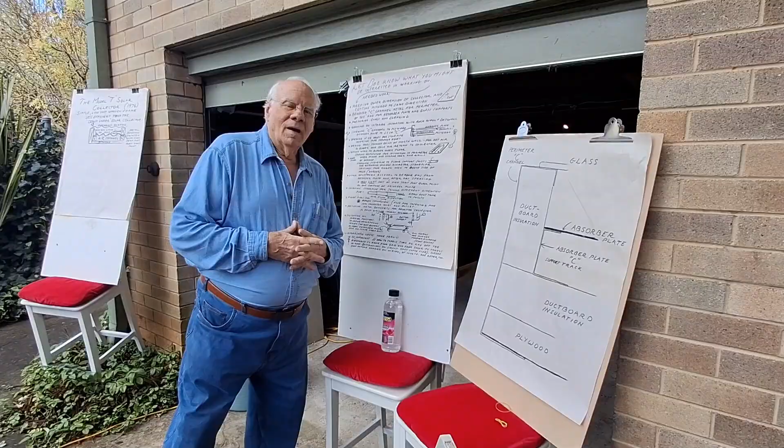So the first thing we'll do is cut this dimension, which is a dimension of the glass, and then we'll build up the collector box, and we'll be putting the collector on the north wall of the house vertically. I want to explain to you a little bit of the schemata of what we're doing, which can vary quite a bit.

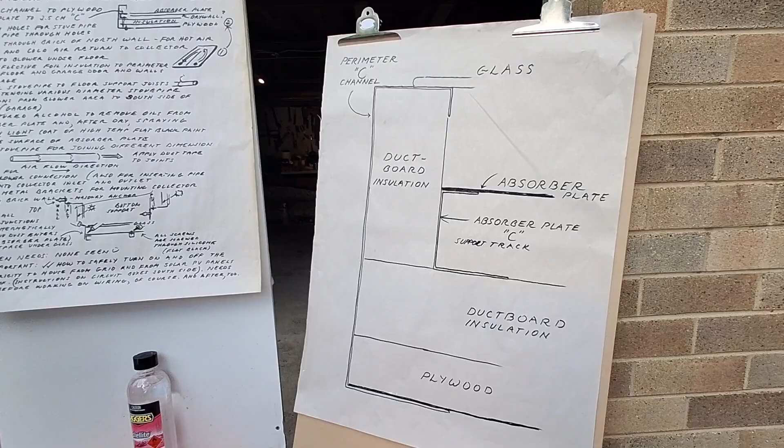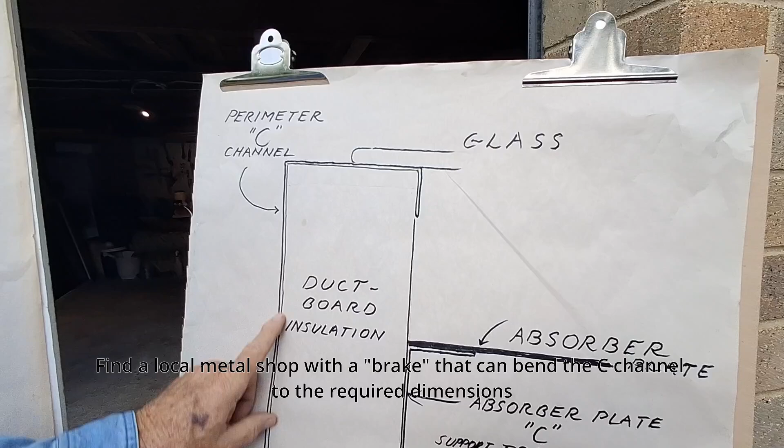In fact, in the old days, maybe you can show this here, we used to make collectors out of wood. And then they started to smoke and char with the heat. So instead of using wood, we now use what we call C-channel, which is bent in a sheet metal shop as a C, a big C. So that'll be the perimeter of the collector right there. And then here's a plywood, so it's going to actually go behind the plywood to keep moisture from coming in. And that's all going to be on the vertical on a wall.

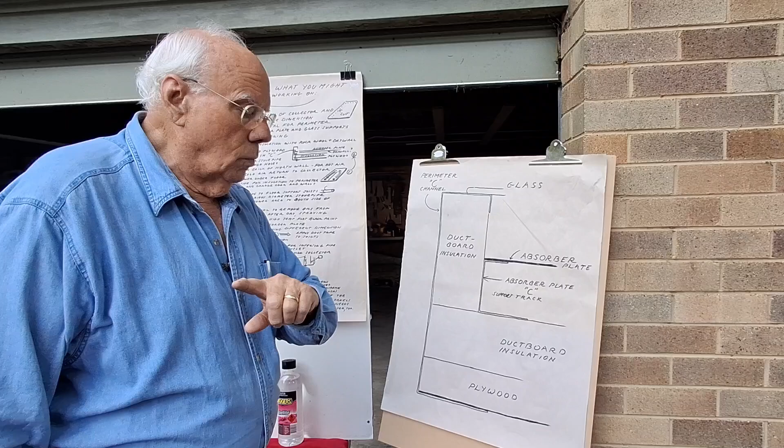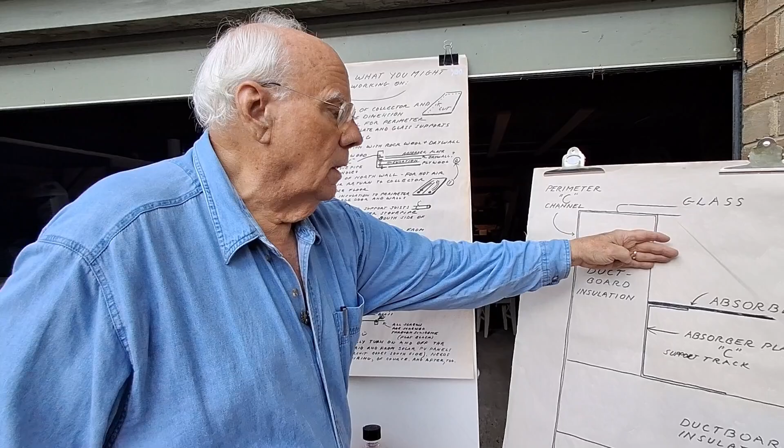So what we're going to work on next is this step over here, where we're going to put two holes into the collector. One will be for the hot air going right to the blower. The blower is going to suck air through the collector, and that'll help clamp down all the interior parts of it. If you were blowing that in, it could blow the collector apart, basically. But we're going to be sucking all that down where it's all silicone caulked. So be sure when you put your blower in that it's pulling air through the collector.

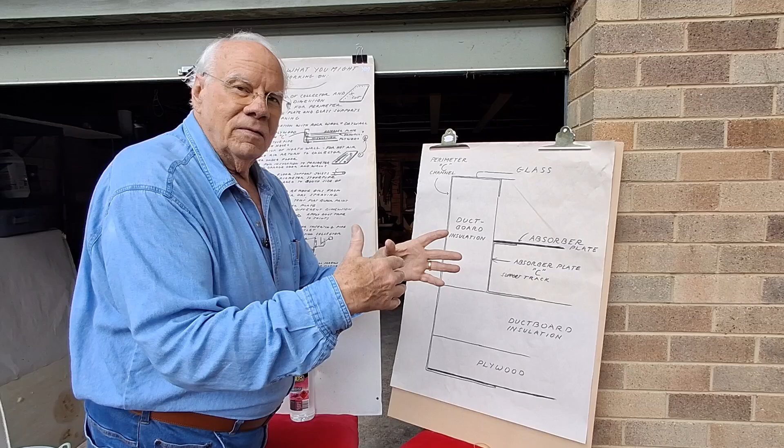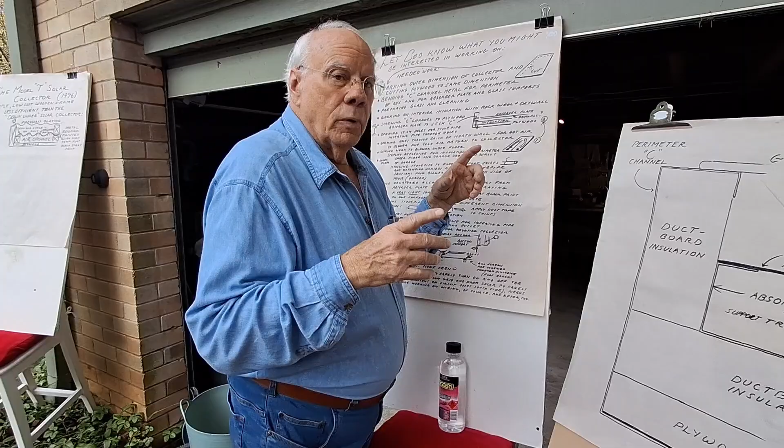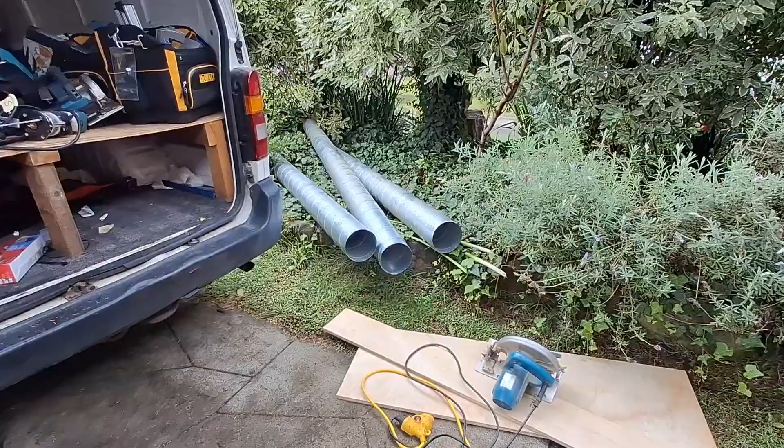Okay, and so Shaun is going to show us how we measured for the hot and cold. The hot line is going to go through a vent already in the crawl space under the floor of the house. The blower will push air, and I think it might be good to show the pipe over here lying down in the grass. It's going to push the air all the way to the south end of the house, because the south end of the house is where it's coldest. And it's going to push it into the garage right there. That's the south end of the house, where we took off the insulation from the garage to allow it to heat the floor.

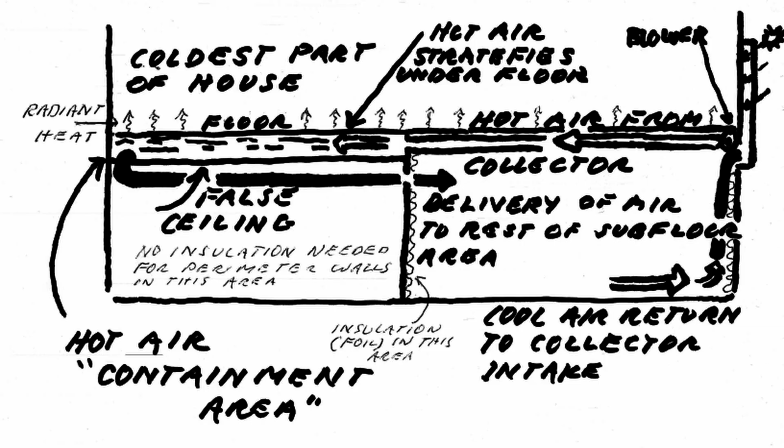And we have found out that when you blow hot air under a floor, the heat stratifies, the hot air stratifies under the floor and turns the floor into a radiant heat source. So Leona's going to be able to go barefoot this winter, or she'll get her money back. This is for free. I'm not charging anything.

And so Shaun will show how we did the measurements for the inlet and outlet to the collector. And how much did you give a little extra so the pipe would fit through easily? 3 millimeters or 1/8 of an inch. Okay. This is just standard 6-inch or 150 millimeter galvanized steel spiral wound pipe, but you could use seam weld or whatever you got. These are joiners. They're also nominally 150 millimeters or 6 inches. The joiners are male. They slot inside the pipe and they have an actual dimension of 148 millimeters. The pipe has got an actual OD of 153.

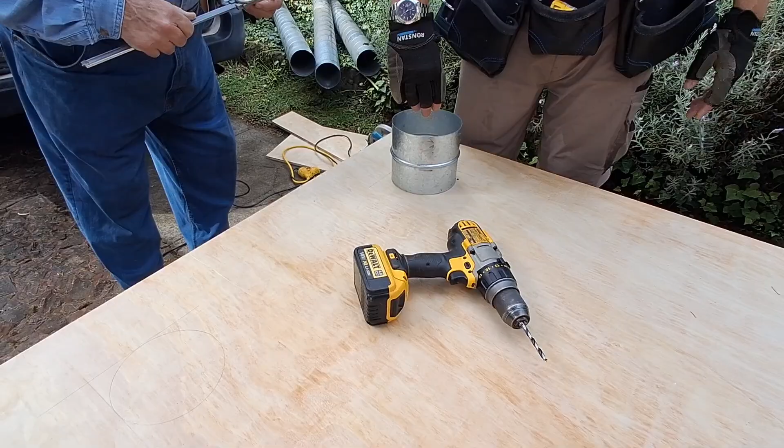We're going to cut the circles here. I've just drawn a line around them roughly, and then we're going to use whatever you've got. You could use a jigsaw, you could use a hole saw. We're going to use a router today because that's what we've got. And cut the hole slightly bigger. We're going to stick the male joiner in there, and then we're going to stick the pipe over that. And what did you use to make these lines? Yeah, just use a sliding square, whatever tools you got. We've set that in 5 inches or 125 millimeters from both sides, and then just draw a circle there so that they match up roughly.

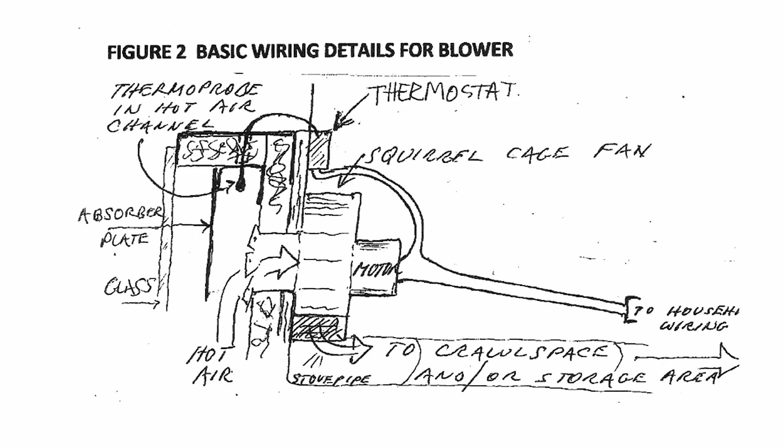So this will be the hot air close to the electric line. It's important to get the blower connected into the electric line, and so the hot air should be as close to the blower as possible. And this will be the cool air return over here. And I think we're ready to roll.

Oh, and I've got some good news. Yes. The sun's out. Well, that is good. What did you just do? I just tidied it up a little bit.

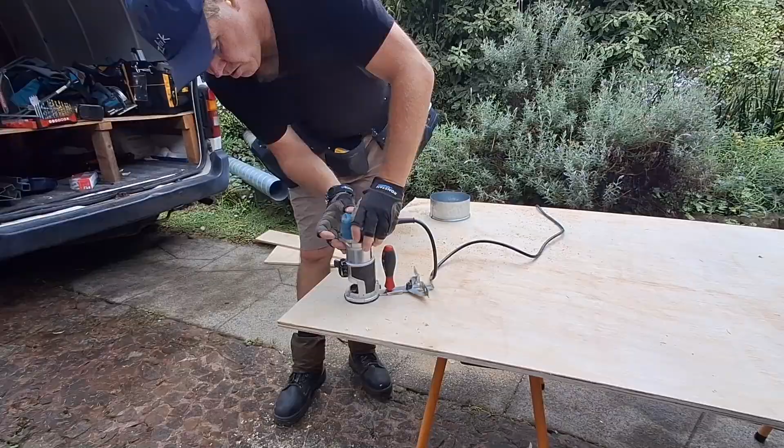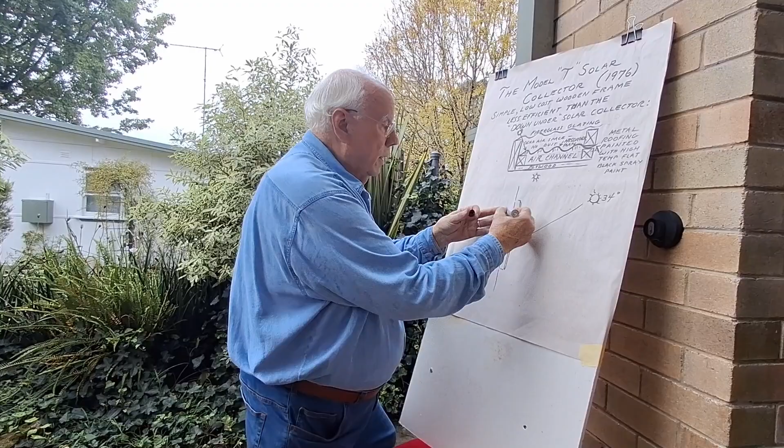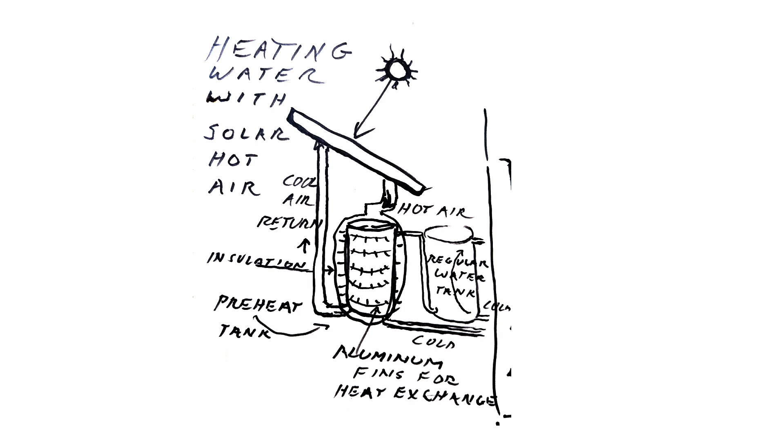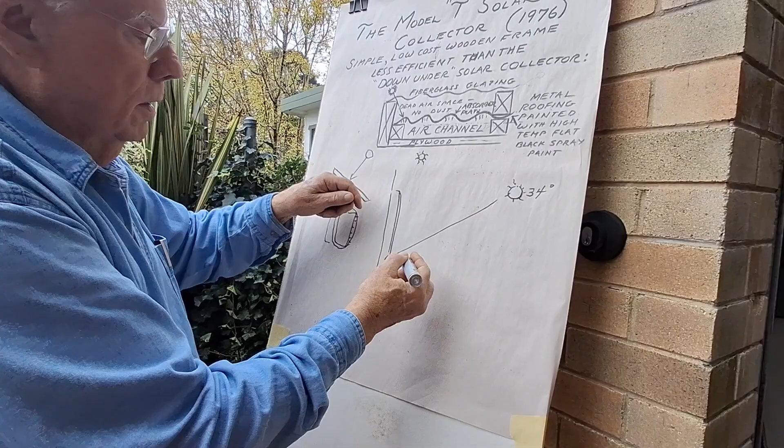I want to show the importance of a vertical collector on the wall if you do not want the summer sun to heat it. Now, if the collector were on a roof, one thing we've learned to do is to heat water with the summer sun, by blowing air around a water tank with fins on it, and then insulation around that, so that you can actually heat water with hot air, and then return that from the water back to the collector in the summer. Well, the system we're doing is not to heat water at all. It is to heat the house. And in the summer when the sun is high, you don't want the collector to turn on.

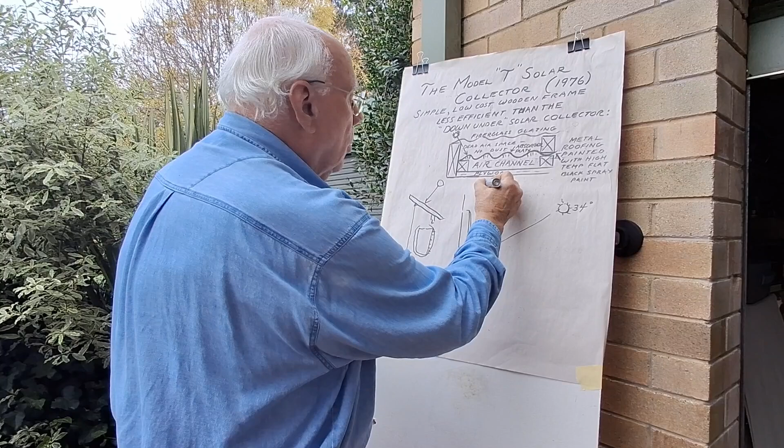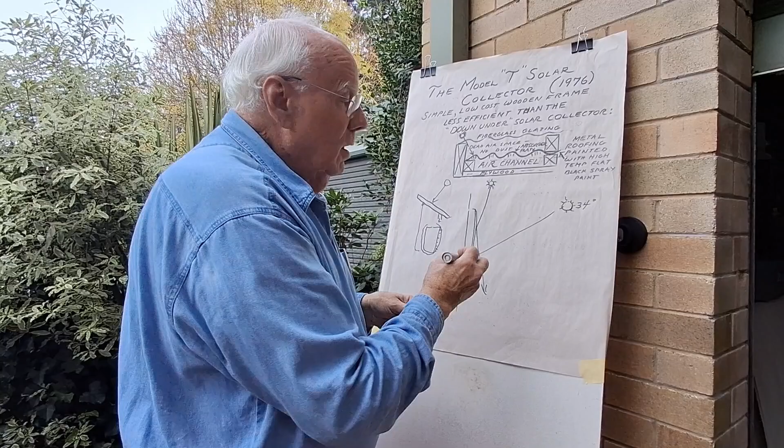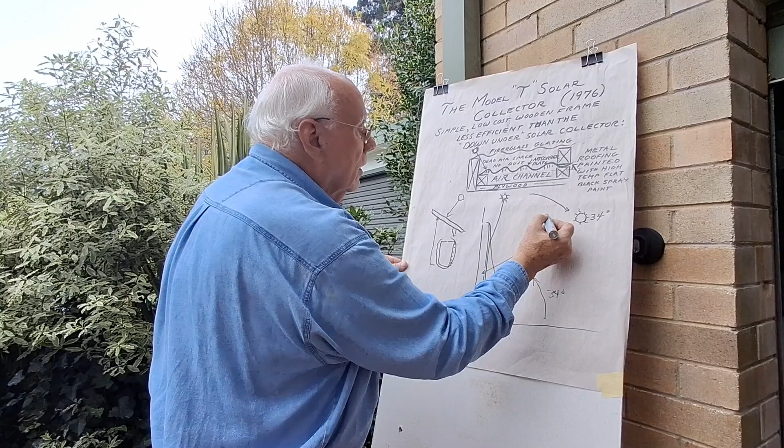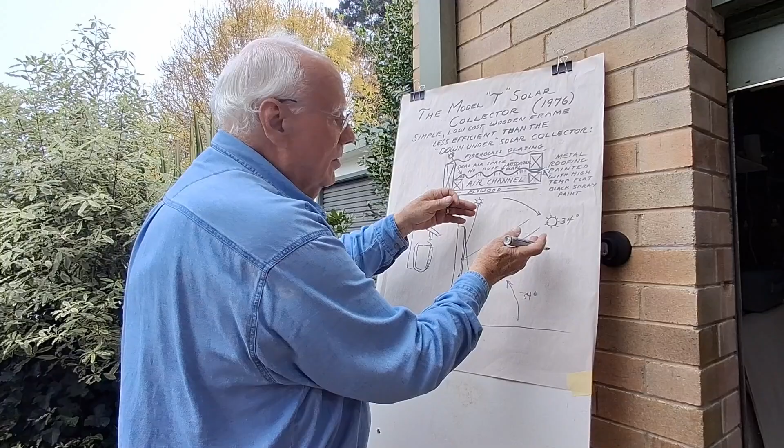And so what we call a real low angle of incidence bounces the sun right off, and it does not heat up the collector. But when you get the sun in the wintertime dropping towards the horizon, here in Wentworth Falls, the lowest point on the winter solstice, this is a 34-degree angle right here, okay? And therefore, the sun's rays penetrate into the collector. All the rays from the sun are parallel, by the way. They all enter into the collector, heating it up in the winter. So the colder it is here, the more hot air you'll get. So it's the way it all works out. And then as the sun comes back up, it turns on less until you don't need heat in the summer.

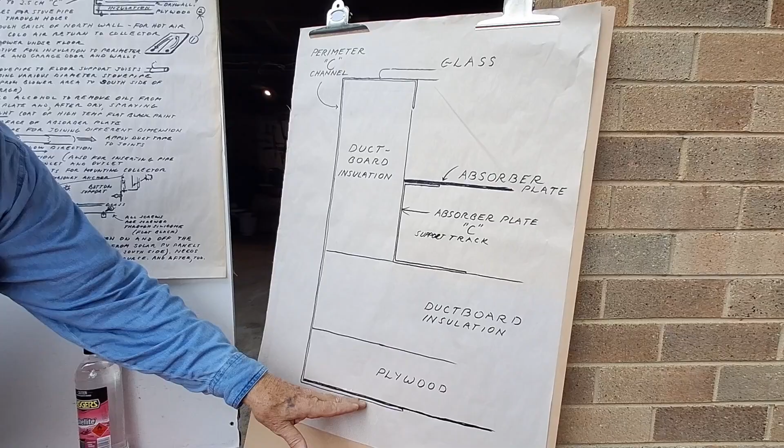And so we're going to go ahead now, and let's move to this chart over here again. We're going to go ahead and put in the C channel, this big C, behind the plywood. So that'll be our first step to building the box for the collector. These collectors could actually catch on fire in the old days, back in the 1970s when we started building them, because we made them out of wood. And it got so hot in there that they started smoking. And so we've gone to C channel, which is what this is.

You can see the C, right? And so this will go like this. You see how when we turn the collector over, we'll have the perimeter of the box. And so one thing we don't want to do is have two pieces meet at the corner because it'll leak. And so we're going to actually bend this and have a solid piece of metal there. And that's a little tricky, but it looks like Shaun knows what to do. So let's watch him cut out a notch to be able to bend it.

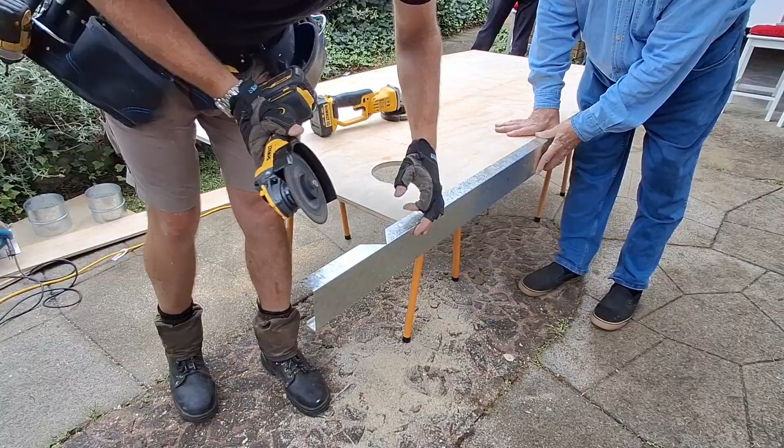That's a 90-degree angle, and then it just bends without having an opening there at the corner, because it could leak. And we want this airtight. So all we have to do, I hope, is we'll see how this works.

These are self-tapping screws so that they tap right into the metal. I'm just lining it up. These can be a little farther apart. That section there that overlaps right here and over there, those two sections.

So now we're ready to pop rivet this up into there, tighten it up. And you can see how there's very little possibility of air escaping from the collector. We don't want any dust getting in there. Just so it misses the plywood, I guess.

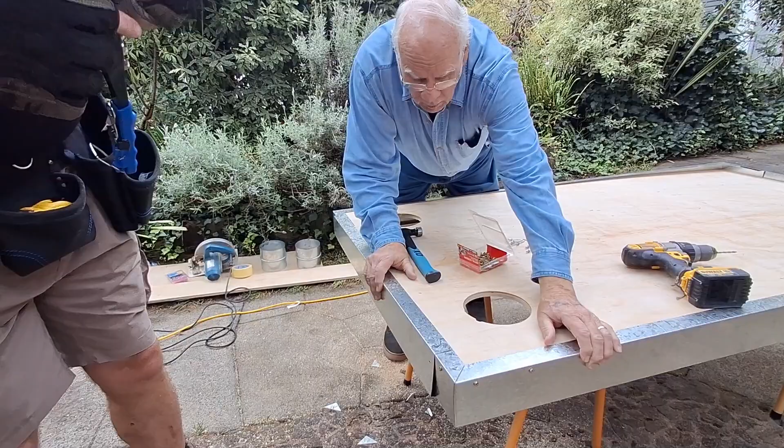The reason why we like pop riveting is that it's nice and smooth, it's not like a screw. It goes right up in close and makes a real airtight connection. And we'll do that on these two scabs, these two parts here.

We're going to flip this collector over and work on the inside of it now. This is the back side that'll go against the wall. So we're going to take this crimping out, which helped us to put the two parts in the overlap position. We'll take that out now and smooth that out because the glass is eventually going to go right on top of here. This ductboard insulation will be inside the collector, and the air is actually going to move right over

this surface. And just to be extra cautious, we're going to put silicone caulk, using spatulas or whatever, to smear a real thin layer over this fiberglass, so that it won't move into the airstream. We've opened up collectors 40 years after using that, and it works just fine. So silicone the side that faces the air chamber.

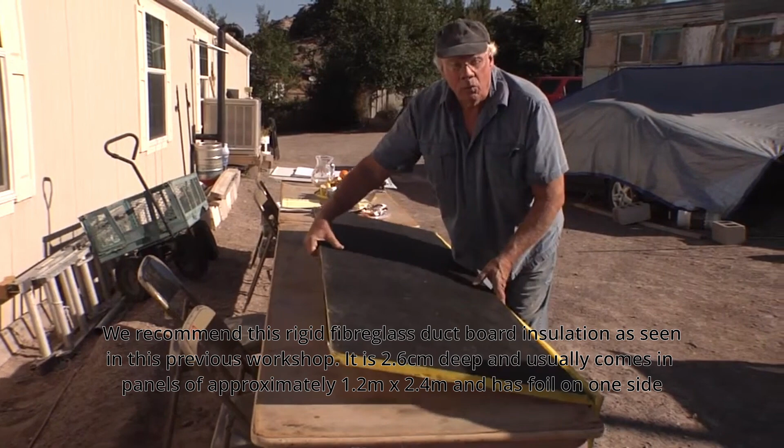I want to point out that we used to do it this way. We used to use this side, thinking that was a great place for the air to move. And after a few years, we found little flecks of aluminum in the airspace. So we don't do it that way anymore. We do it this way. And the silicone, which will be smeared here in a moment, will take care of the problem of fibers in the airspace.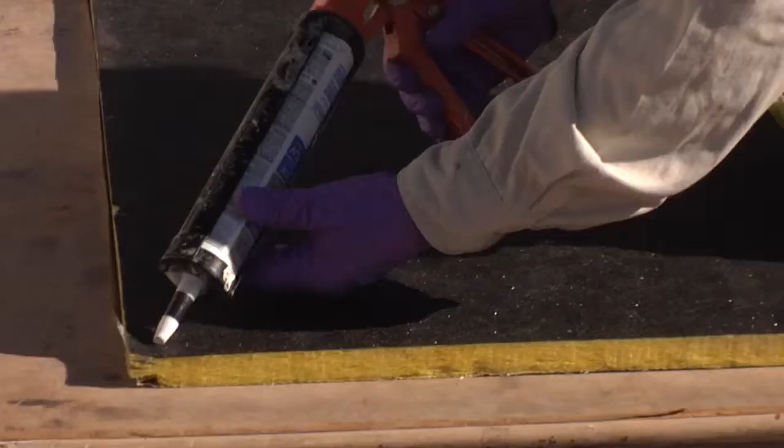Okay, now this is the inside of the air channel right here. We have that silicone caulk over the fiberglass so that the fiberglass doesn't get into the airstream. We are going to put in now what we call a C-channel support for the black absorber plate that absorbs the sun's energy. We'll be taking a look at putting that in in just a second, but right now we're putting in the supports for it.

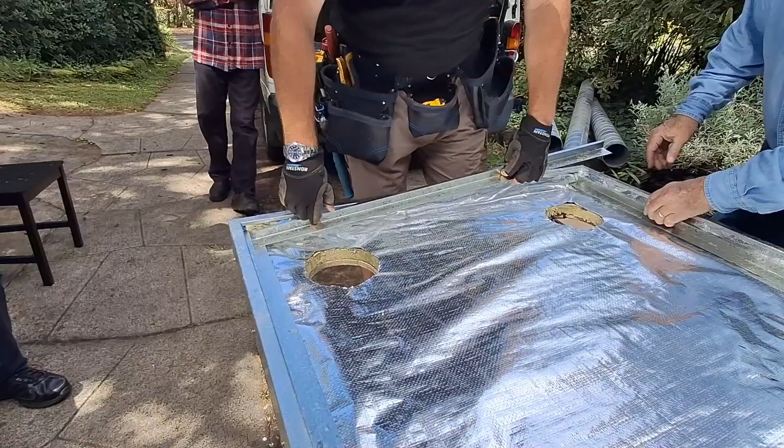And so it's a C-channel, as you can see right here, running all the way around, and the absorber plate will sit right on top of that, and we'll screw that down to it. And he's putting in the last piece of that perimeter C-channel for the absorber plate, right over our insulation. So he's notched that out so it'll fit a little bit better right into this lip here that holds up the absorber plate.

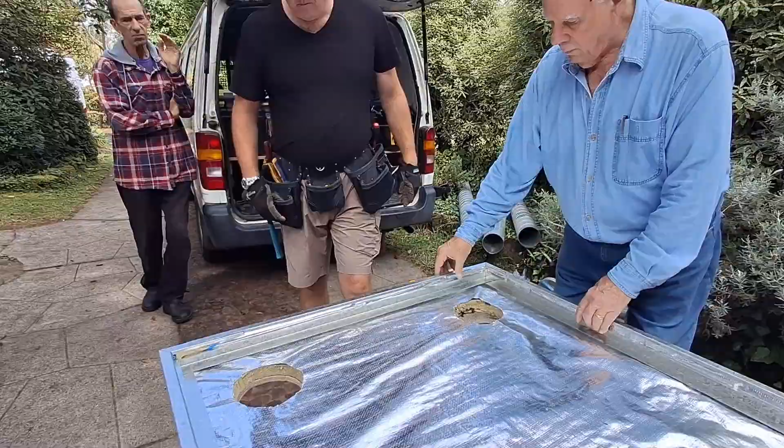And then I wanted to point out the holes that were made with a box cutter tool, just right through the insulation, for the cold air return to the collector. And this will be the hot air outlet on this side, also cut right through the insulation.

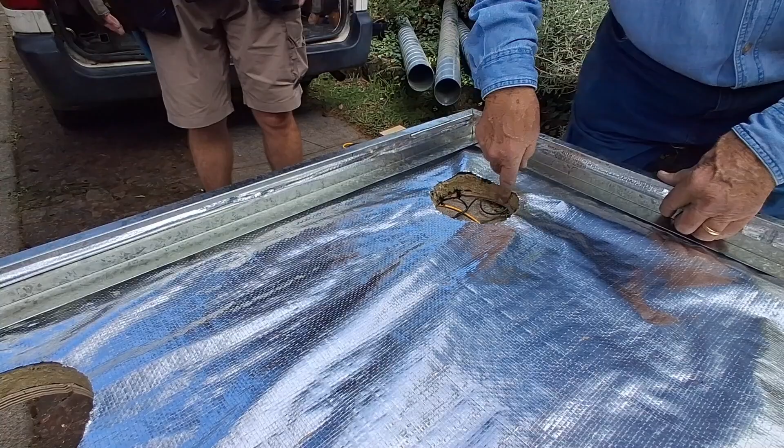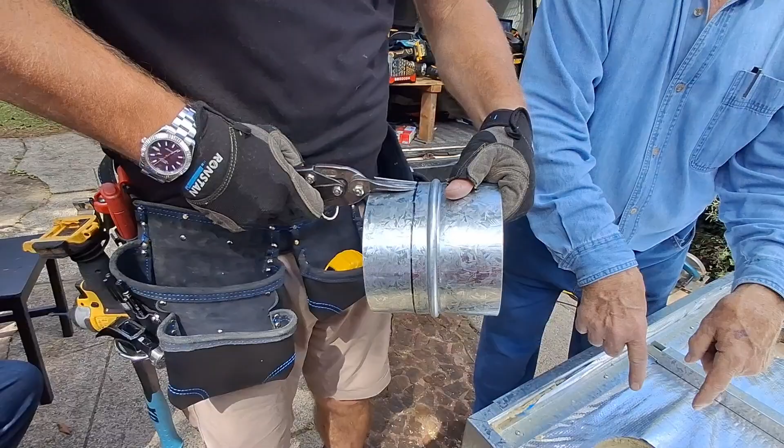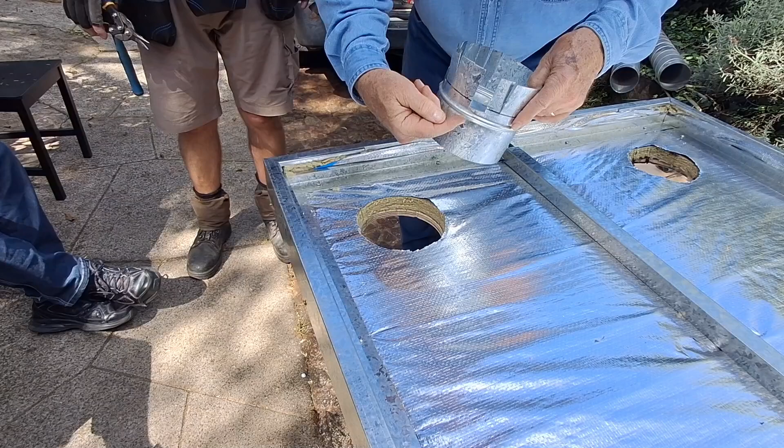We are preparing to put the pipe into the airspace of the collector. And so we're cutting tabs. Can you see that? The tabs being cut. And can you just briefly demonstrate how we'll put it in there, and then we'll fold these tabs down and screw it, right? In fact, it'd be good to caulk in here and underneath all this area before we bend these down, because that way we'll be sure to get the air to go right in there and not leak out through here.

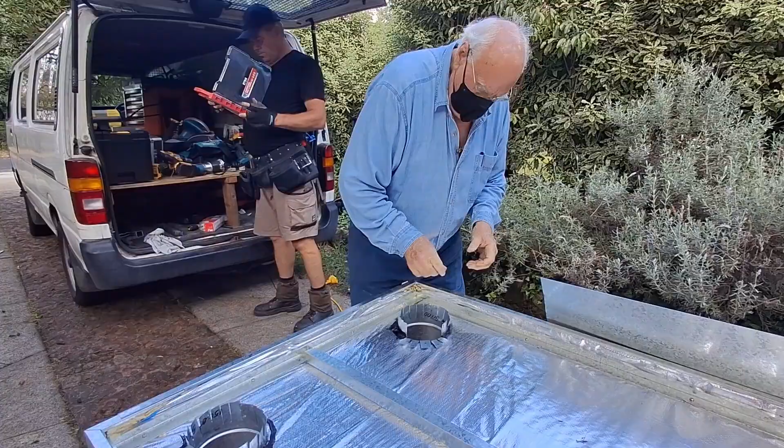What's going to happen is that air will be pulled in through the cold air elbow that goes down to ground level. Cool air will come in. It'll be split real nicely by this baffle, which I love. And it'll curve around and then come into the suction side of the squirrel cage fan.

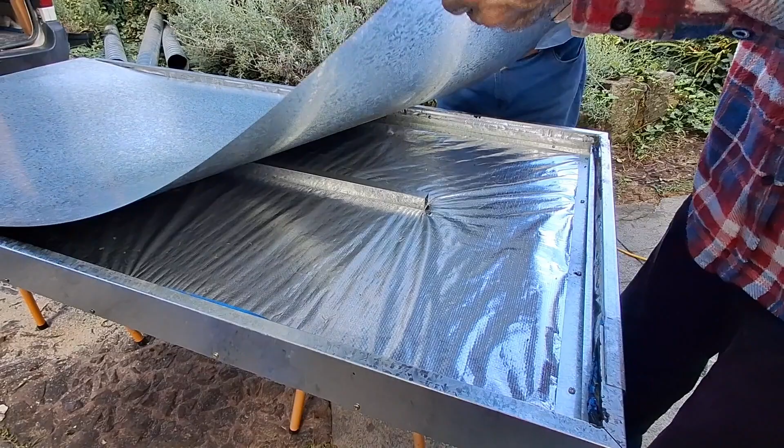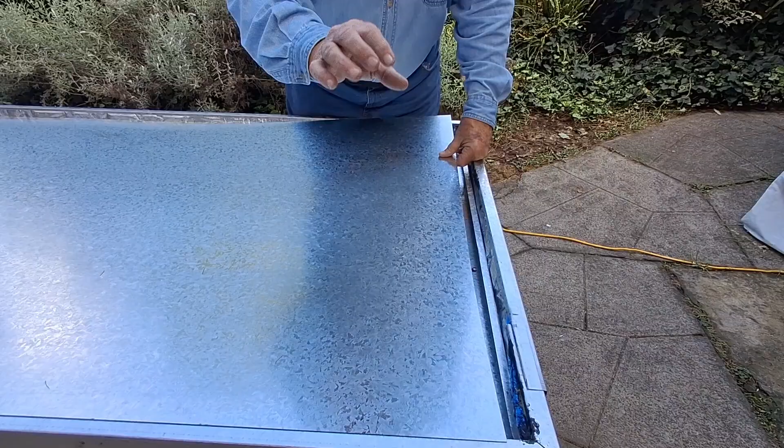So on top of this C-channel here, which we call the absorber support, will be the absorber plate, and that'll be sealed with caulk so that this air space will be absolutely hermetically sealed against the front of the absorber plate and the glass. Okay, that's good. And then we're going to paint this a flat black to absorb the sun. And this is going to be down in this level right here. And then on top of here will be the glass. And the sun will be able to come through into a dead air space to heat this when we paint it black. And that'll be the greenhouse effect right there.

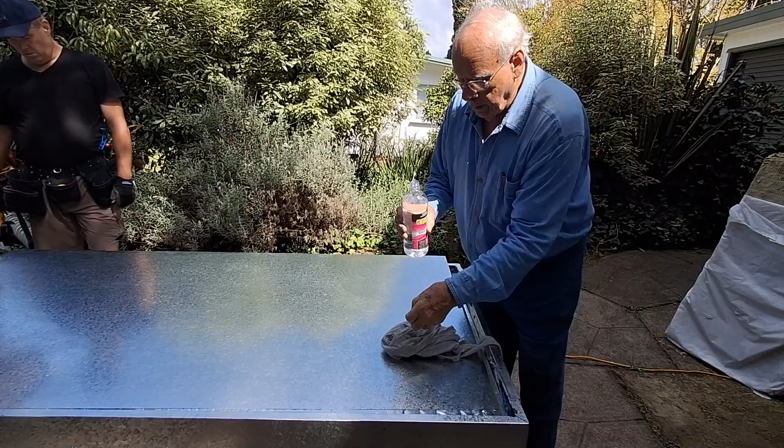We are going to use denatured alcohol. If you put this onto this absorber plate before you paint it, it will get rid of the oils and help make the paint stick better to the plate, and it won't peel off over many years of use. We've opened up collectors 40 years after building them, and they've been perfect. So no worries there, mate. Very good.

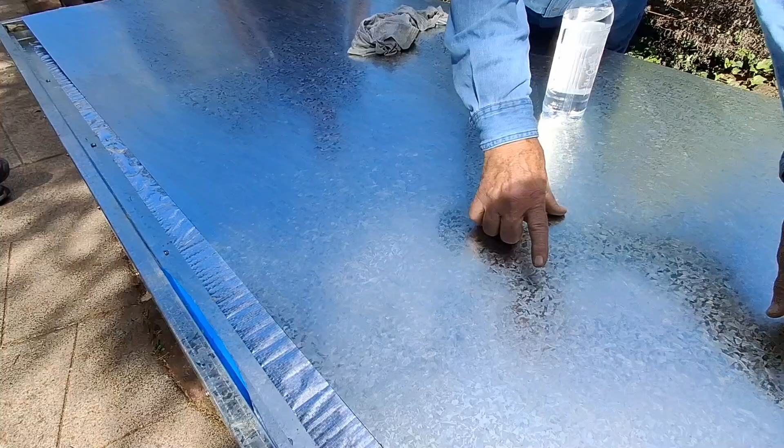And now we're going to be trimming this absorber plate right along here to fit perfectly on that little lip. Maybe here you can see the lip right here that we'll be putting it on, and we'll screw that down and have a nice absorber plate before we put the glass on. Of course, we have to paint this first, right?

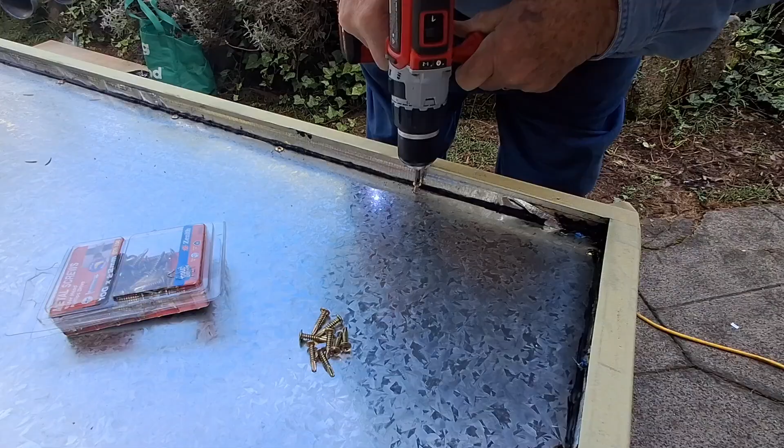And so I'm putting in the last screw here in the absorber plate, and it's going right into that C-channel underneath here. There we go. So we're done. All of these screws are holding down that absorber plate, and now we're going to go ahead and spray paint all of this with a real fine layer of paint from a spray can. You don't want to put that on too thick, or it will actually block the transfer of heat to the metal.

We're going to now spray the absorber plate with a real fine layer of high temperature flat black paint. So you see it's good up to 1,000 degrees Fahrenheit or 540 centigrade, and that's going to be wonderful for this collector. Just a real fine layer. We put masking tape all around the edges here where we're going to put the glass.

So when you're attaching the glass onto the metal frame, there's all different types of silicone, sealants, and such things. Sikaflex makes a whole range of products. They've usually got a 3-number designator like 117, 269, or all the rest. Get online, find out the appropriate one. You'd want something for attaching metal to glass.

We're going to silicone now the top perimeter C-channel, and then lay the glass down right onto that silicone and let it harden overnight. So I'll go ahead and start putting the silicone down for the glass. There's the finished product. We've got the glass down on a bead of black caulk here. And I'm going to clean off a few little smudge marks that we've got. There. Oh my goodness, it looks great.

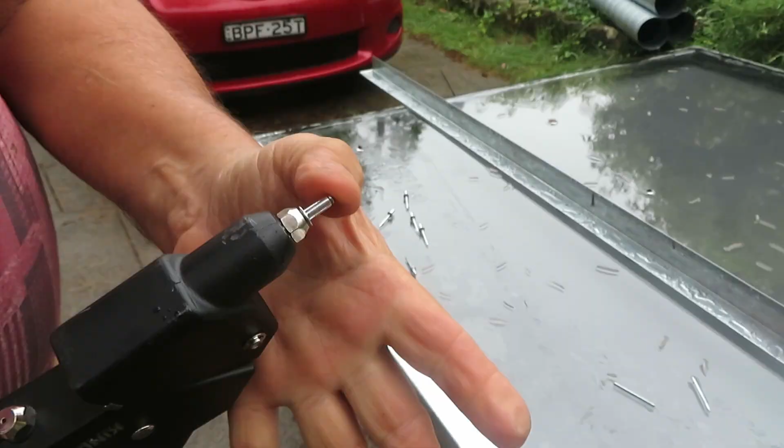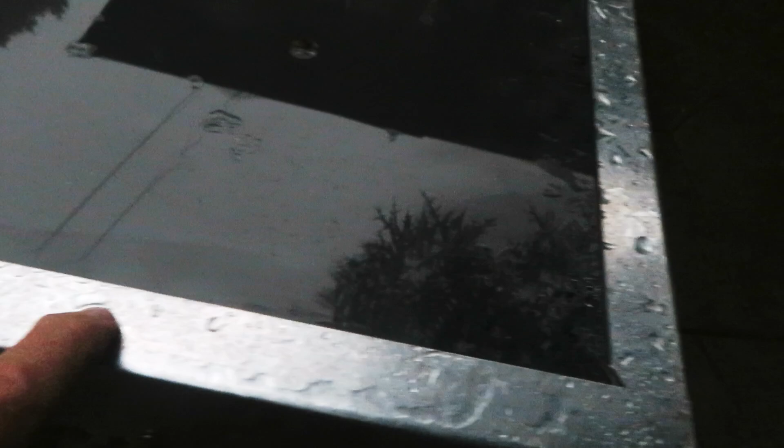You say this is available at Bunnings, and it's 1.5 mil galvanized. Yeah, it's galvanized. 30 millimeter, 30 millimeter. Now we have the frame on the collector, and it will protect the glass and also look a lot better because underneath here is all that goopy silicone caulk. It didn't look all that great, but now the collector looks great, I think. There we go. What I call the down under collector.